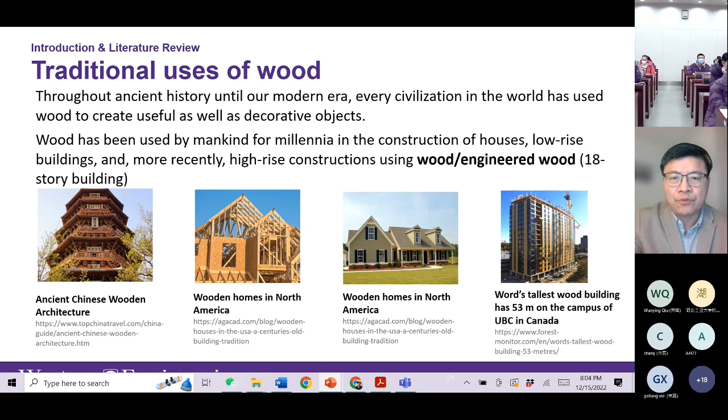A few years ago, Canada actually achieved the highest or tallest wood building, 53 meters high, on the campus of UBC in Canada. So they built the world's tallest building in wood structures. This is another application of wood for structural applications.

But if you look at wood structures in industry applications, actually they do not use the wood directly — they produce engineered wood. This engineered wood includes a family of different types, for example plywood, medium density fiberboard, medium density particle board, OSB (oriented strand board), and LVL (laminated veneer lumber).

So those engineered woods have advantages compared to natural wood. Engineered wood has dimensionally stable, more uniform properties, and they can utilize some wood waste, for example chips, sawdust, and other materials from the forestry industry, as well as utilize biomass from the agriculture industry, for example crop residues. They can produce engineered products from different types of waste materials.

The wood actually has some limitations. If you want to use wood for structural application, wood normally has poor water resistance — it can absorb water — and also wood is not good for fire resistance, and not good for mold resistance. This makes wood have some challenges if you want to use it for structural application.

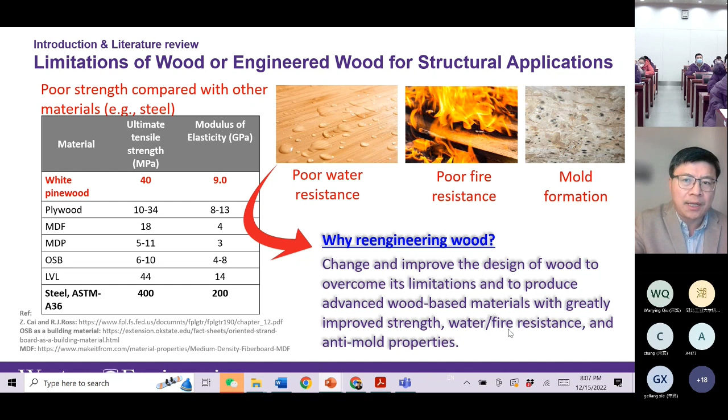So for reengineering wood, the reason for using it is to overcome some limitations of wood-based materials, to improve strength, fire resistance, and anti-mold properties. That's why engineered wood has gained more application in structural applications, in house construction, or in other structural applications.

We can convert wood to different materials. For example, we can do carbonization to make carbon for electronic applications, and turn wood into transparent wood for construction and window applications. We can also turn wood into an absorbent for environmental applications, and make wood into a structural application by densifying it. So wood has multiple applications because of its unique structure.

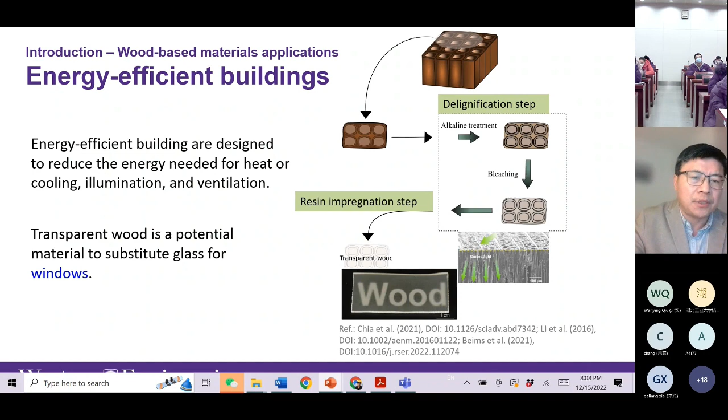For energy efficient buildings, this application was recently published by researchers in the US. They can make wood transparent, and this transparent wood can make a transparent window for energy efficient building applications.

Normally windows are made of glass materials, but if you make a wood-based transparent material, it has better properties. It can provide better light distribution, and also serve as thermal insulation, regulating the temperature inside the room. It can also be modified to add tunable properties, such as absorbing formaldehyde. This makes wood-based materials more useful than glass for window applications.

For environmental applications, people are still researching this. One example is a publication from 2019 that won awards, where they loaded several nanoparticles into the wood, turning it into a filter to remove water pollutants, such as E. coli, bacteria, and methylene blue dye from textile wastewater. They can use this for water treatment and heavy metal removal as well, making wood an interesting absorbent for environmental applications, particularly wastewater treatment.

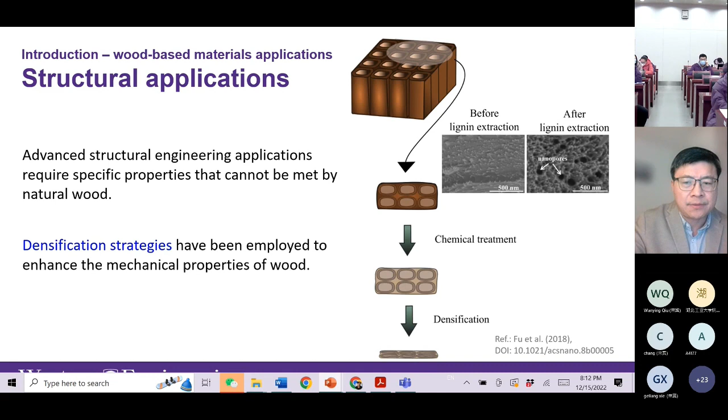After densification, this densified wood provides strong strength properties. This has been reported by a US group led by Professor Hu at the University of Maryland. They published several excellent works in Nature and Science, producing different types of high-performance structural materials after lignin removal and wood densification.

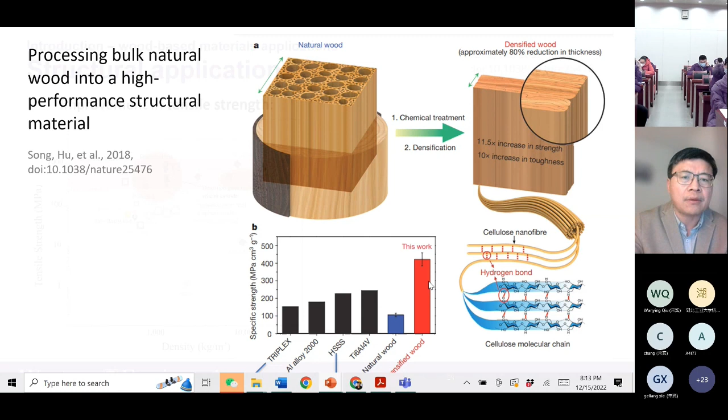Still from their group, they report this strong wood material in terms of tensile strength versus density. Looking at tensile strength alone, the densified wood falls in this circle here, and many alloys, such as aluminum-copper alloys and nickel alloys, are at the same level of strength. But in terms of density, wood has significantly lower density than the metals, making wood both the highest strength and lowest density material.

So this can gain lots of application in the transportation industry. For example, we can produce much stronger and lighter materials. And for the aircraft industry, this can make more energy efficient structural materials. They can reduce the density.

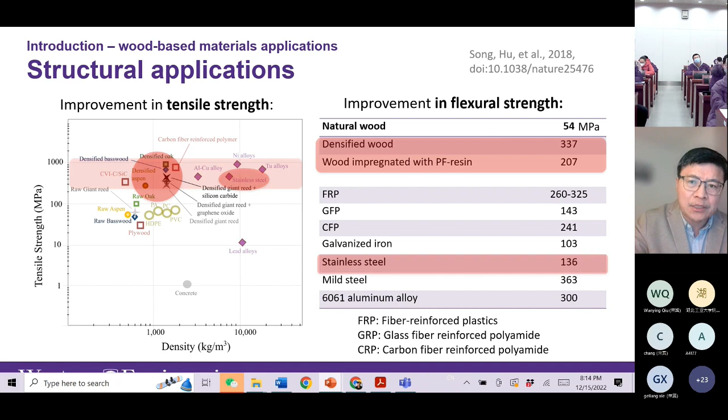And this table also compares the flexural strength, which is a bending strength. This flexural strength of densified wood is actually much higher than stainless steel, almost 3 times higher, and almost equal to some aluminum alloy. So this shows another aspect: this wood can be stronger in terms of flexural strength, bending strength.

But the challenges - nothing is perfect. It's still under investigation, under research. So some of the common challenges are that the processing time is very long. If you look at Professor Hu's published research, they remove lignin and then densify the wood. They take more than 24 hours processing.

So it's a long processing time, which makes industry application difficult. And the waste lignin is not utilized - it's just removed without utilization, and this is another kind of resource we should utilize. And the resin - they do impregnation of resin into the wood after removing lignin, but this resin is mostly produced from petroleum-based resin, for example petroleum-based phenol-formaldehyde resin or petroleum-based epoxy resin.

So how to solve these challenges? How to address these challenges? That's our research motivation - we want to address that, to overcome the long processing time, to utilize the lignin, and to avoid the use of petroleum-based resin.

So our research objectives, as I said, to address those challenges, we first extract lignin. But with our lignin extraction, we extract more efficiently. We use ultrasonic assistance to make the extraction more efficient to remove lignin and make a porous delignified wood.

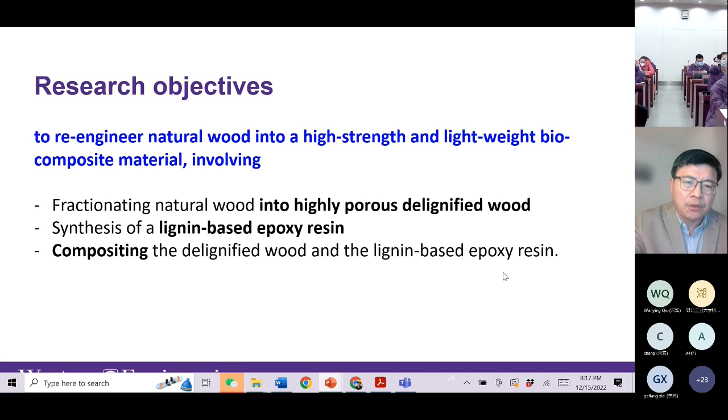So we do the delignification, remove lignin, and turn the natural wood into a porous structural wood. Then with the delignified lignin, we do the conversion - we convert the lignin into epoxy resin. Then we do the composite: we impregnate this lignin-based epoxy resin into the delignified wood, and then do densification, pressing, hot pressing, to make a composite. That's our final material.

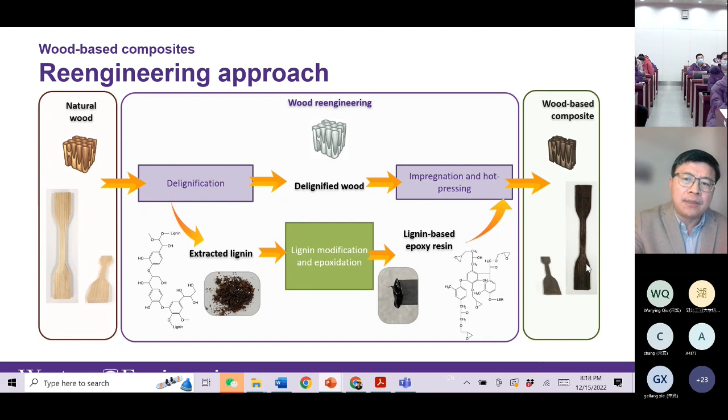This material is derived from the original natural wood, so we want to compare the property against this original wood. We call this process re-engineering. The idea is that we do the engineering first - we separate the components first, then do the conversion, another engineering step, then we do the composite back, which is another engineering step. So we call this a re-engineering approach, with our target being to make stronger and lightweight materials. So this is the overall idea for this research.

And this slide shows the morphologies. Natural wood has 70% porosity, and after removing lignin, we improve the porosity to 80%. The lignin content is reduced from about 30% to about 5%. So we significantly remove the lignin using the ultrasonic-assisted organosolv method, using organic solvent to extract the lignin.

And this is the lignin properties after we do the characterization, for example molecular weight and purity, and the epoxy content after we turn the lignin to epoxy resin - we list it here. In terms of molecular weight, our original lignin has a number average molecular weight of about 1,000. After we turn it to epoxy resin, this molecular weight does not change too much - the epoxy resin just epoxidizes the lignin functional group to introduce the epoxy group into the lignin structure.

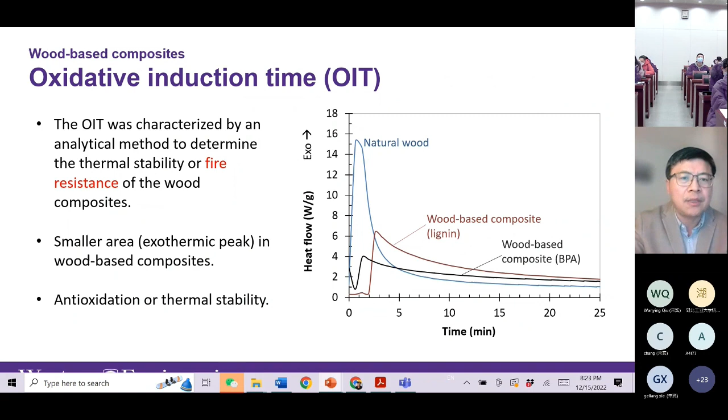Compared to natural wood, which can be oxidized or ignited within 1 to 2 minutes, our wood-based composite with the lignin-based epoxy resin can elongate that time to about 3 to 4 minutes. Also, the peak area shows how much heat is released from oxidation - this peak area is much smaller compared to natural wood, meaning the oxidation reaction is much suppressed by this wood-based composite material. That's another good property in terms of application, meaning it has some fire resistant property.

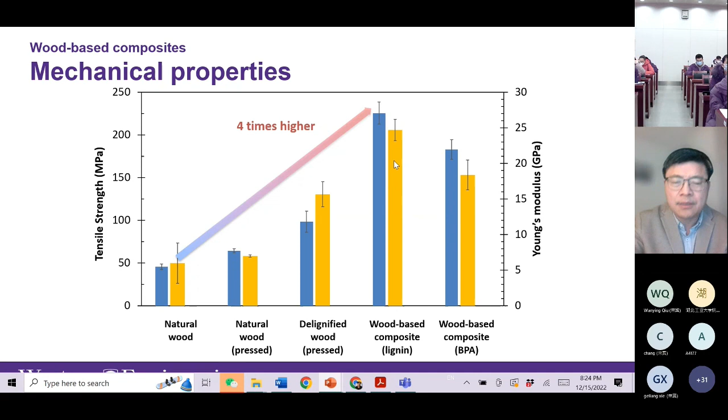Similar results for tensile strength - our material is almost 4 times higher in tensile strength compared with natural wood, and also much stronger than the commercial epoxy resin-based composite. This is another property demonstrated by this new material. So our lignin-based epoxy resin composite with wood achieved very high tensile strength and fracture strength.

Because of the lighter weight, this makes it more superior to metal materials - it's stronger and also lighter. So now we've achieved our target with this re-engineering approach - we obtained highly strong and lighter materials, and our process is better than the literature process. We do not have a lengthy delignification step, and we do not need densification for a long time - our time is only minutes, compared to 24 hours in the literature. This makes this process more advantageous than the current state of the art.

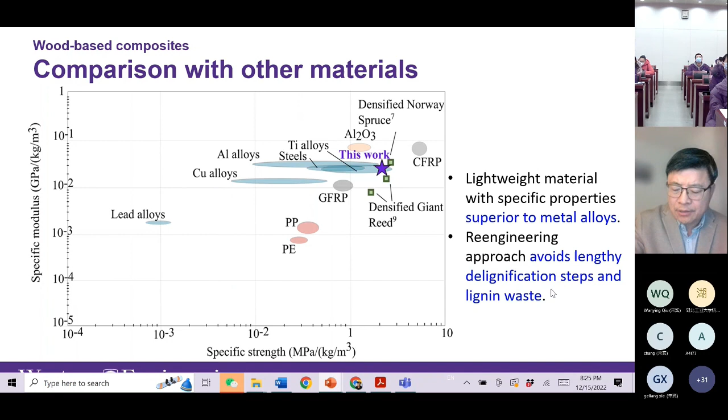So this material may not be suitable for acidic conditions. For some reason, we did some investigation on that, looking at why this acid condition can make this material lose intensity, lose strength. So we did some XRD analysis.

We show that after we do the HCl and sodium hydroxide treatments, the structures, if you look here, compared to original natural wood, the crystallinity reduces. That's probably one reason - they become more amorphous, so they lose crystallinity. This could be one reason contributing to the strength reduction.

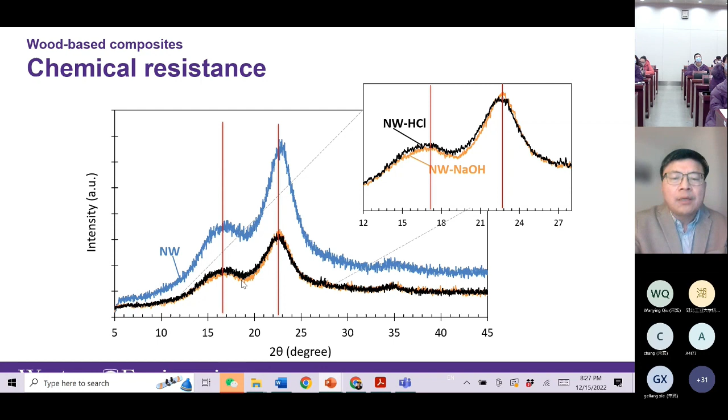In addition to the crystallinity, we also try to explain better about the mechanisms. Another mechanism is about the internal tension. Because for the original materials, epoxy resin and wood, after curing, we add some amine to cure that. So this amine can repulse each other, creating some internal strain, internal tension inside.

But if this material is in contact with HCl, the hydrogen chloride creates some electrostatic force within the materials - they have attraction force. This attraction force balances some of the tension, so the overall tension reduces. The overall tension reduction will reduce the strength, because the tension enhances the strength.

So that's about the materials, the reason, the explanation in terms of material science - why the HCl will reduce the strength of these materials. So we conclude that this material may not be good for acidic conditions, but it could be good resistant to other applications for water, sodium hydroxide, or sodium chloride.

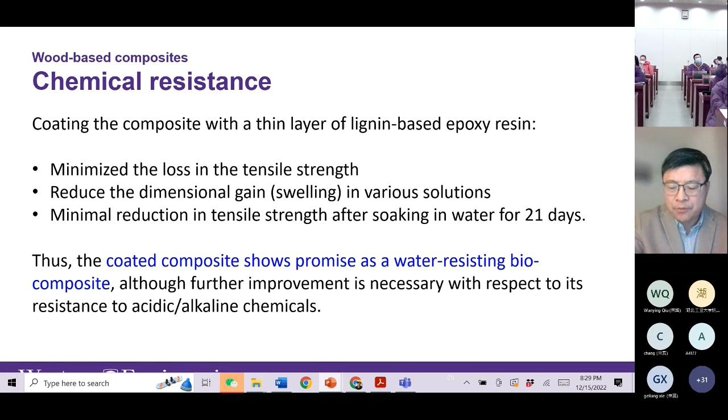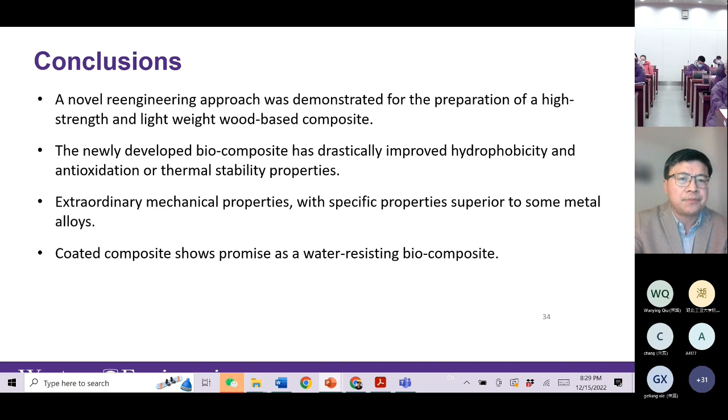The conclusion is that we achieved this novel process to produce stronger and lighter materials, and we can use that for many applications, for structural applications. And compared to the literature, we solve this, we address this as a challenge, and we make this process a shorter time, and then we utilize lignin, and we wouldn't use a petroleum-based resin.

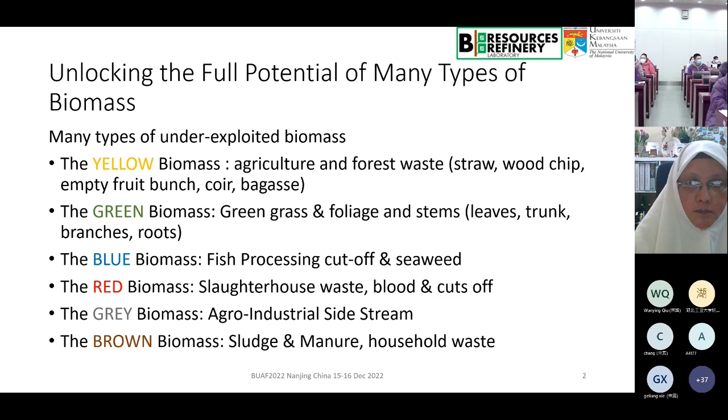Lots of green and yellow biomass, for example like oil palm fiber. We cultivate quite a huge amount of plantation area for palm oil, where you have lots of fronds which can be collected every day, the trunk, and also the oil palm empty fruit bunch.

We also grow quite high, huge amounts of rice plantation in the northern and eastern parts of Malaysia, where we have quite huge amounts of rice straw, and we have sugarcane and pineapple leaf, especially in the northern and southern parts of Malaysia. This is not being utilized. Every year after they harvest to get the fruits, the leaf is left unattended.

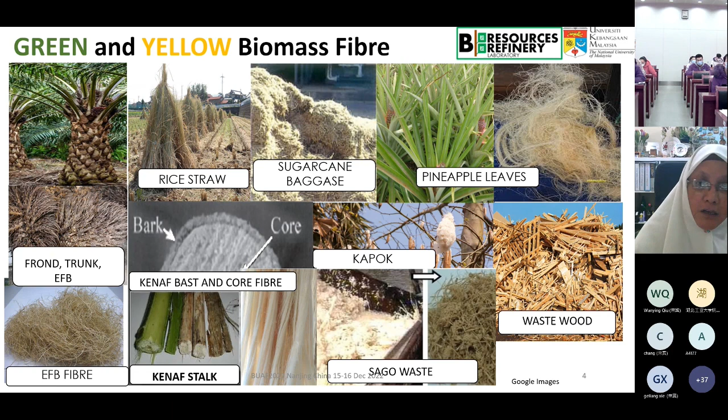And you have lots of sago which contains a high proportion of cellulose. And like in China you have cotton, we have kapok. The proportion of cellulose is also high in kapok, but the waxy material is very high, and there's lots of wood waste. And back to Kenaf, it is a very fast-growing species.

As far as Kenaf is concerned, within 2 to 3 months you can harvest it, where you have the bast fiber, the outer layer of the Kenaf stalk, which gives a good proportion of fibrous materials. The core part absorbs so much moisture, is very hydrophilic, and has a very high pore structure, and has been utilized a lot for low-end use, for example oil spillage, animal bedding, and so on. So for those working in composite materials, the bast fiber has been used a lot.

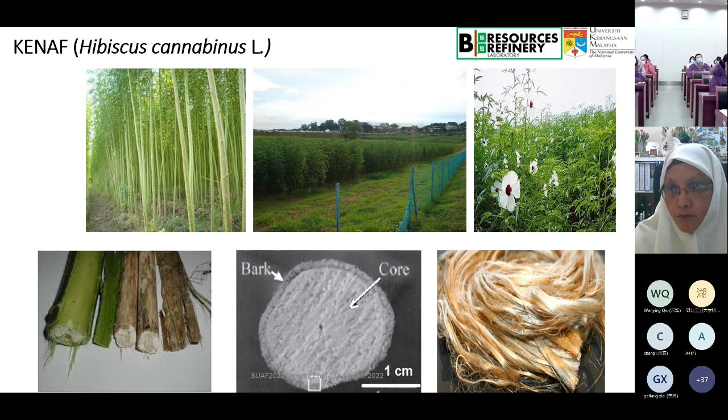As far as textile materials, weaving it together with the polymer and then pressing it makes a very good composite, good for automotive and other applications. Kenaf has been introduced in Malaysia since more than 10 years back, where many states in Malaysia started planting it.

The northern part of Malaysia has been focusing on production of Kenaf seed. They are trying to increase more area for Kenaf plantation because the urge for the bast fiber is higher. But the core part is not being utilized - there's a high proportion, about 60% of Kenaf core, which is not being utilized because of the short fiber. So we thought it would be good to convert this particular Kenaf core into high value-added products.

Like oil palm fiber - if you fly through Malaysia you will see many areas that have been cultivated with oil palm trees. After 5 years the trees start growing fruits. But the fronds have to be cut down, pruned almost every day, and the best fiber is from the fronds. But collecting the fronds from the palm oil plantation is very costly.

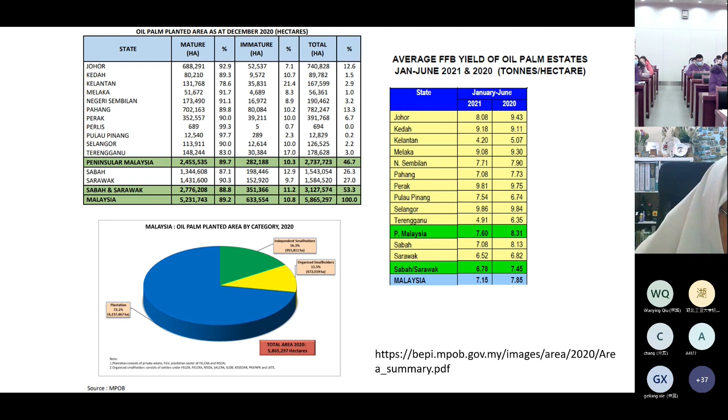This is the area where we cultivate palm oil, whereby every year, for example from June 2021 up to June, from January you're talking about 7.1 tons per hectare - they can produce an average of fresh fruit bunch per hectare. You can imagine how many hectares we have in Malaysia - a total of 5.8 million hectares has been cultivated as far as Malaysia is concerned, and lots of the area is from big companies.

So back to the biomass conversion technology, we went through lots of talk yesterday. They're talking about biorefinery, from energy, biofuel, bioethanol, biodiesel, biofuels, and biorefinery.

And you're talking about bioenergy: direct combustion, cogeneration, transformation, pyrolysis. And the next one is biomaterials.

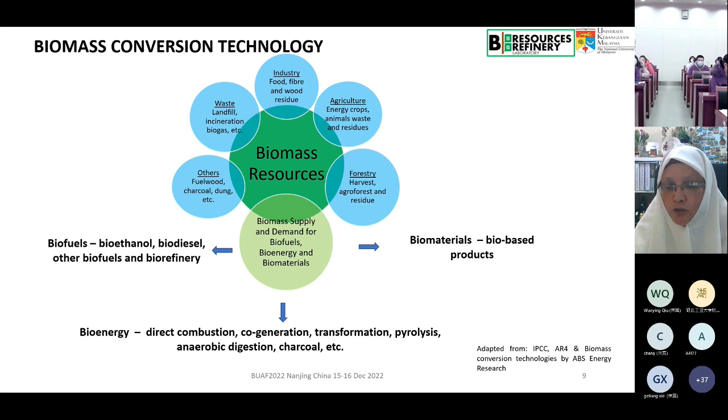My main concern, since I'm in the materials area as a chemist, is on biomaterials for bio-based products. Meaning after you make direct combustion, transformation, or pyrolysis, the liquid biofuels from here, we convert into biomaterials for high value added products.

Back to the kenaf and palm oil empty fruit bunch. The chemical compositions, as far as kenaf is concerned, you will notice the lignin is quite high, about 35%, with the holocellulose about 50%. Holocellulose is the content of cellulose and hemicellulose.

In palm empty fruit bunch, lignin ranges from 15 to 30%, depending on which part of the fiber is taken, and the hemicellulose is quite high, with the cellulose ranging from as low as 23 to as high as 65%.

If you're talking about cellulose, it's very good to convert these materials for high value added products. The lignin from EFB and lignin from kenaf is totally different, because lignin in EFB has a much higher proportion of the syringyl unit compared to the one in kenaf.

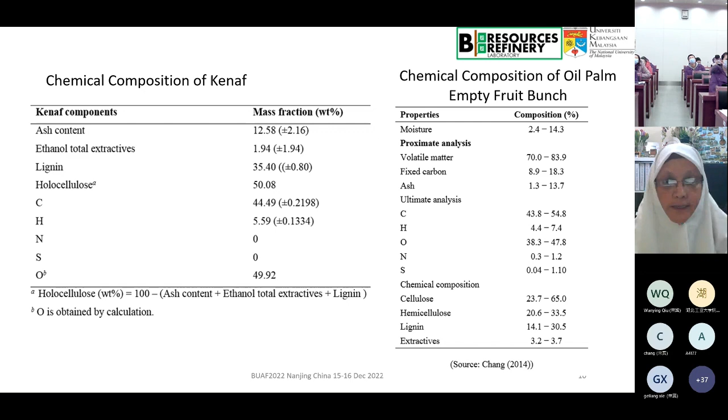We know that as far as cellulose is concerned, it has the crystalline and also the amorphous region. So if you want to do any modification, you have to disturb the crystalline area to make it more amorphous for any chemical modification.

You can dissolve cellulose by separating the microfibrils among the cellulose chain with a certain solvent. So you can separate and dissolve that, and regenerate it back to form another kind of cellulose.

The structure of lignin is very complex, that's why I keep asking how to make it stable, because lignin has a lot of conjugated double bonds, which is very active as far as UV is concerned, and will tend to polymerize.

Unlike hemicellulose, which are sugars and easily attacked by fungus and so on, which makes this material very biodegradable. The same with cellulose, which is made from glucose units, but it is more resistant because cellulose has amorphous and crystalline areas, compared to hemicellulose, which can easily be extracted from the materials.

So in this particular reaction, we are doing liquefaction, whereby we convert biomass into biofuel. You can convert using direct combustion, pyrolysis, gasification, and direct liquefaction.

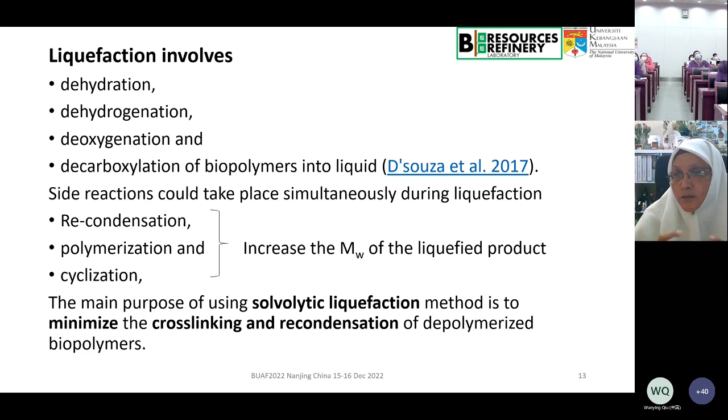That's why if you want to handle lignin, you have to use the lowest temperature possible. If not, you have to have a certain technique so that it doesn't polymerize, so you don't end up with so much residue at the end of the process. So now I'm talking about polyol, because polyol is very important as far as functionality is concerned.

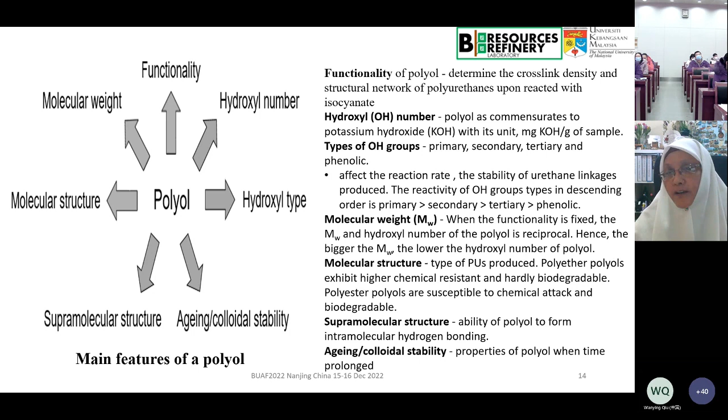We are using a catalyst. Before, we just used sulfuric acid, but now we make a combination of sulfuric acid and lactic acid to not make it so vigorous, but to control the reaction. With that, we can have about 10% as far as yield is concerned.

Lots of the lignin area has been delignified, and some cellulose has been degraded and dissolved in the liquefaction solvent, giving you the residue here. The most important part is to make the residue as low as possible, because you'll notice some residue is very high, since unlike oil palm empty fruit bunch, kenaf is very hydrophilic. It tends to absorb so much solvent when added to the system, making the solvent less reactive to work as a liquefaction reagent.

So you have to modify the process when doing kenaf in this liquefaction process. For oil palm empty fruit bunch it's much easier. We make two comparisons, one using empty fruit bunch, and the other using just the cellulose without lignin. Without lignin, you can have as low as almost 0.9% residue left, because we wanted as high a yield as possible. For EFB, you get about 4%, which is much lower compared to kenaf.

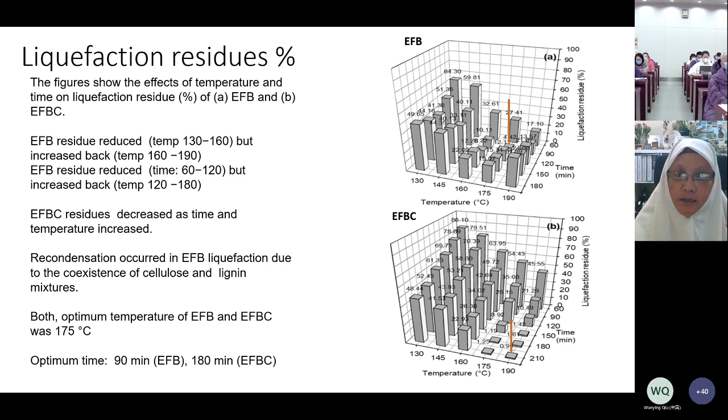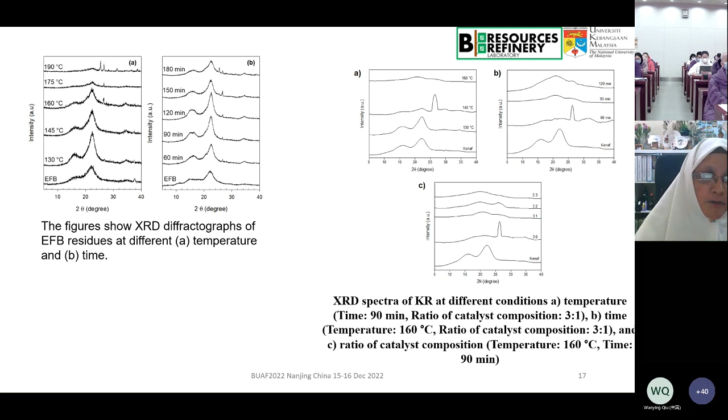So temperature, time, and the stirring factor contribute a lot to the percentage of residue. Looking back at the XRD, you'll notice that the crystalline area, whether kenaf or oil palm empty fruit bunch, has been disturbed tremendously and becomes very amorphous, to make sure it can be dissolved. This is the XRD of the residue, because if you run the XRD of the liquefied product, you will never see the crystalline area at all - it's all amorphous.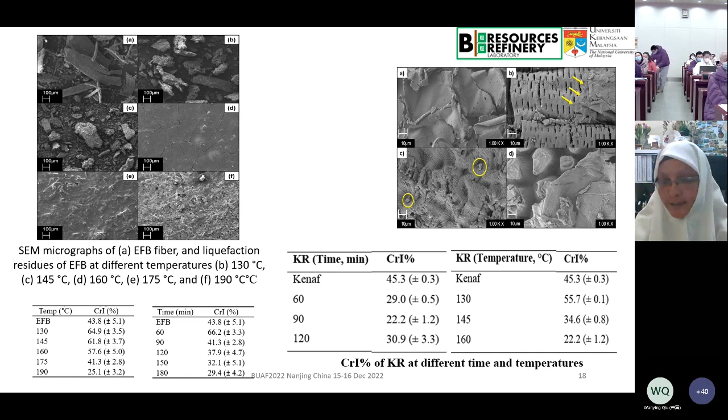This is the surface structure of the residue, and you'll notice that the crystalline area is decreased tremendously when measuring the residue. It decreases with the temperature and also with the time taken for this particular liquefaction reaction.

We also did the calculation for the OH number through titration. You have the OH as high as 300 plus for the kenaf, and with the ratio of catalyst composition varying from 3 to 0 without lactic acid, to 3 to 1, 3 to 2, and 3 to 3 with lactic acid, the percentage of residue is reduced, giving different amounts of the OH number.

The OH number is very important because when you want to make PU, the number will contribute to the properties of the PU, since it determines how much the OH will react with isocyanate in the process of making polyurethane. For the OH and acid number of EFB, the same thing happens.

At high temperature, the acid number increases because some of the hemicellulose changes and becomes acidic, turning into acid components. The OH number increases but then decreases because some of the phenol OH has been converted into acidic components. So it's very important to make a selection of temperature and time to ensure you have less acidics but more OH in the system, because at high temperatures some of the hemicellulose will be converted into acidic materials.

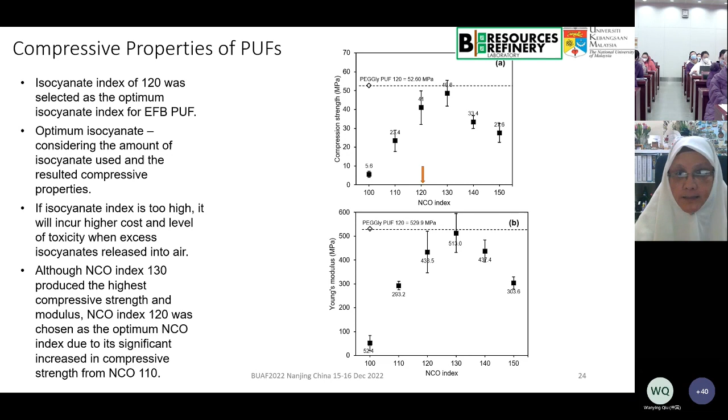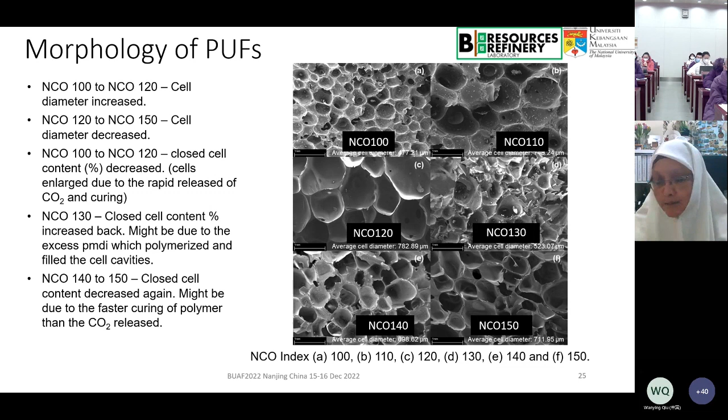But again, natural fiber is very difficult to control, because the lignin itself varies from one species to another, from the top to the bottom of the trunk, or even within the same plant—the percentage amounts of H, S, and G units are totally different even though the components are the same.

So with 120, you will notice the closed cell content is about 58%, and the density is about 166, which is comparably high. The Young's modulus is quite bearable and good, and the compressive stress is about 41.

It's moving by itself. Yes, we are fine, yeah, go ahead. Yeah, it's good, okay, one minute.

So now we're talking about water absorption. You will notice that at 100, the absorption is very high, but with 120 and above, the water absorption is lower, which is very good for a composite material. But for my application, I'm interested in the highest water absorption, because our end product is for agriculture.

So this is an example of the PU we made in the lab. It's very dark in color because of the lignin itself. This one is from kenaf, without polyethylene glycol. This is kenaf at different isocyanate levels, which gives different foam sizes and pore sizes.

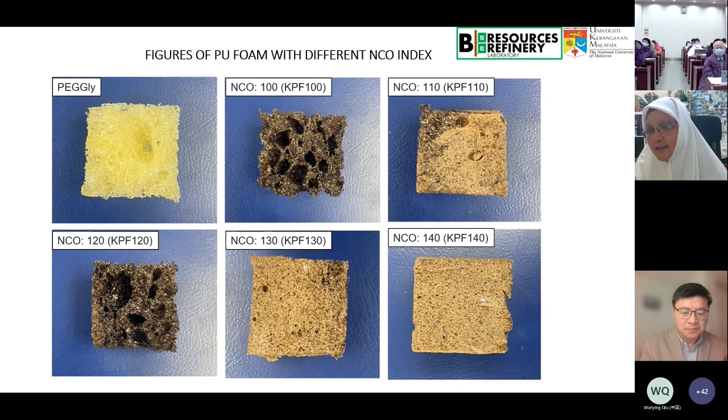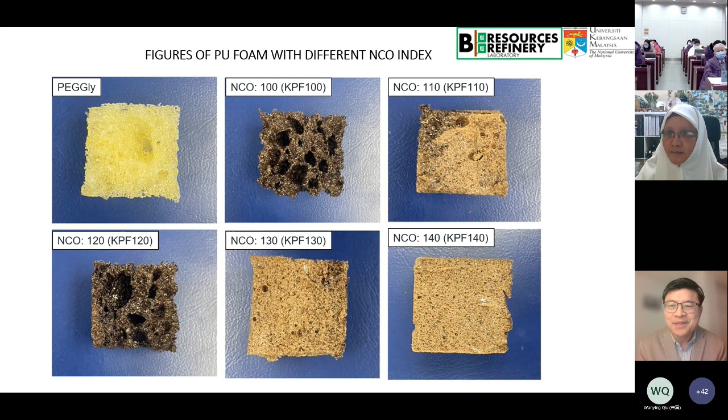Professor Jia comes from University of Toronto, Chemical Engineering Department, and he's a fellow of the Canadian Academy of Engineering, as well as a former president of the Canadian Society for Chemical Engineering. Professor Jia's current research focuses on the nanoporous structure of carbon materials for different types of applications. They produce carbon material from industrial waste, for example from coke or biomass, for applications including green energy storage and solar energy driven desalination. I think it's a very interesting topic today. So Professor Jia, you can start your talk about wood biochar as a structural and functional material for sustainability.

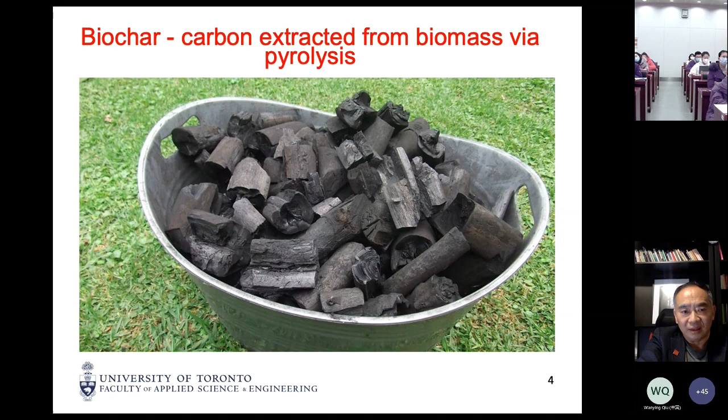It is well known that biochar properties are determined by biomass precursors as well as pyrolysis conditions. In thermal pyrolysis, it depends very much on precursor compositions, temperatures, and heating rate, which is extremely important. The mechanisms involved include thermal cracking of biopolymers, condensation, and rearrangement of carbon atoms. If we look at this diagram, with increasing temperature, graphitic structure can be formed.

At lower temperatures, say lower than 800 degrees C, there will be major changes in chemical composition, and the carbon content will increase. The materials we are dealing with here are produced at temperatures higher than 800 degrees C. As a result, they are highly carbonized, meaning they have carbon content over 90%.

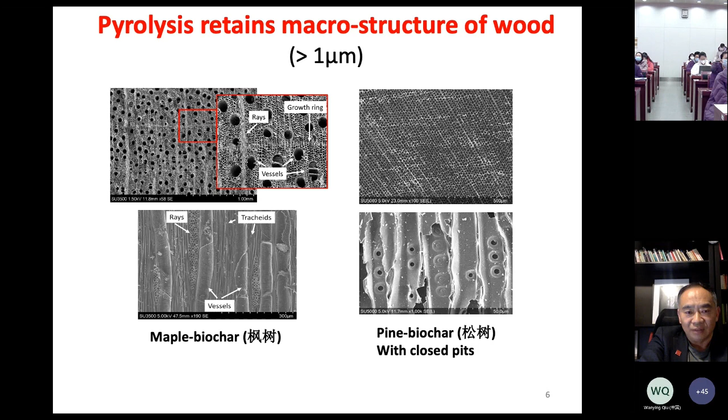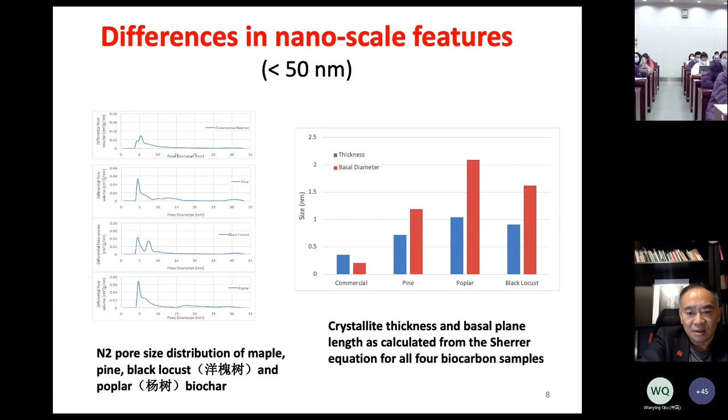So we've had a quick review of some properties of wood biochar. Before I introduce the work of my student, let me quickly summarize the applications of biochar. Everybody knows the traditional applications, including soil amendment, which in terms of amount used is definitely the number one application. Biochar has also been used as a renewable bioenergy source, as a solid fuel, and for cooking and other purposes. People are also looking at using biochar for steel making. Another application area is using biochar as an adsorbent for water and air purification.

There are some emerging applications for biochar, including as an additive to other materials, for example added to cement or polymers for different purposes. At a smaller scale, people also look at using biochar as a catalyst for reactions. There are examples of other people using biochar as a catalyst for water splitting, for hydrogen evolution from water.

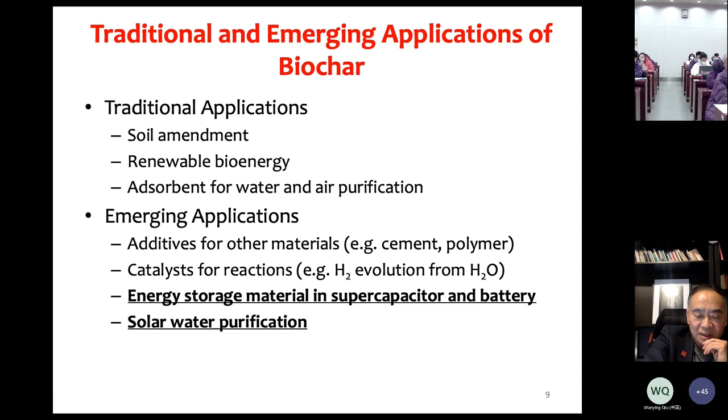The last application, which I'm going to talk about, is work done by my student, using biochar as an energy storage material in a device called a supercapacitor, and also for water purification, using solar energy for that application.

So what I'm going to do now is share some of the work done by my student, and the first piece of work is by Randeep. He worked on the electric conductivities of monolithic biochar. He pioneered this type of work and was among the first to report some of those unique properties of monolithic wood biochar.

By the way, monolithic means the whole piece—we were not talking about powders, which is usually the case when looking at other applications. So we're looking at whole pieces of wood biochar, which basically have the inherent structure of wood.

Randeep studied a bunch of precursors, including hardwoods. The hardest one is African ironwood, which is extremely dense, denser than water, and very light ones are balsa, also a hardwood, extremely light. He also studied common softwoods, and a grass species, bamboo.

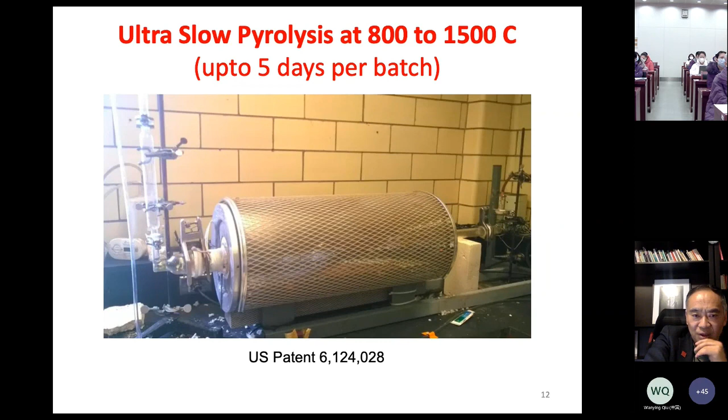Here is the reactor we use—we call it ultra slow pyrolysis—and in some cases, in order to retain structure, the process can take days.

Randeep actually used two different types of measurements. One type is the 4-point method, the purpose of which is to eliminate the contact resistance. In some cases, he also used the 2-probe method there.

First, the interesting thing he reported is elasticities of conductivities. What that's supposed to mean is that if you apply pressure to the monolithic biochar, the conductivity will increase. So with increase of pressure, conductivity actually increases, but if you release pressure, the conductivity decreases. He did that experiment after 1 day and repeated it, and those properties were actually retained.

On the right-hand panel, he's looking at if we apply pressure so that we depress the piece of biochar. What you can see here is that the conductivity increases with pressure, and if the depression is over certain values, the conductivity actually decreases - in this case that is due to the formation of micro cracks under those pressures.

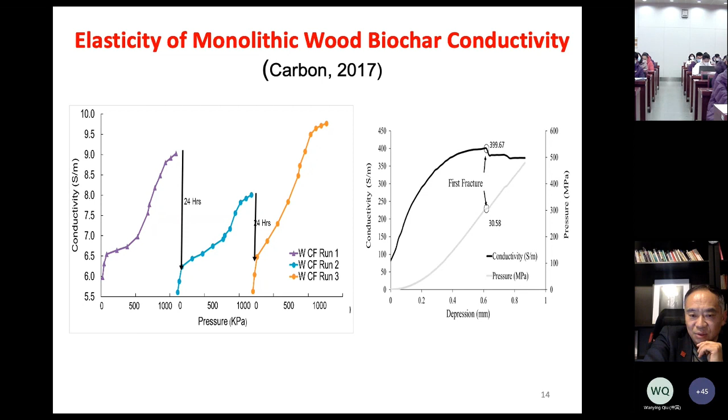Another interesting finding is that the electric conductivity is highly dependent on crystal size, in this case crystal volume. What we plot here is an increase of conductivity with crystal volume, showing almost a linear relationship. Different colors indicate different materials here.

The one point I want to make here is that if you look at the maximum measured conductivity here, in this case that is about 24,000, which is about almost 10 times higher than the graphite direction perpendicular to the graphene surface.

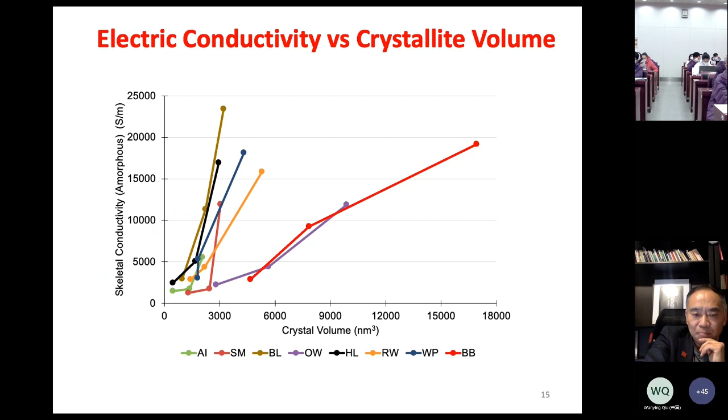Another finding is anisotropic wood biochar conductivity, meaning that the conductivity of wood biochar along the axial direction is always higher than the radial direction, regardless of the precursor. The reason behind that is the preferred orientation of graphite crystals in those wood biochars.

Let me now switch gears to another piece of very nice work. This is work by Evan Young, who used monolithic wood biochar to produce what we call ultra-thick supercapacitor electrodes, with the purpose of increasing the volumetric capacitance of a supercapacitor.

This diagram talks about the difference between supercapacitors and batteries. Everybody knows batteries, but supercapacitors are less known. The difference is that batteries can have a high energy density but low power density. On the other hand, supercapacitors have a high power density but a low energy density. High power density means you can charge a supercapacitor much faster than a battery, but as indicated in this diagram, supercapacitors tend to have a low energy density.

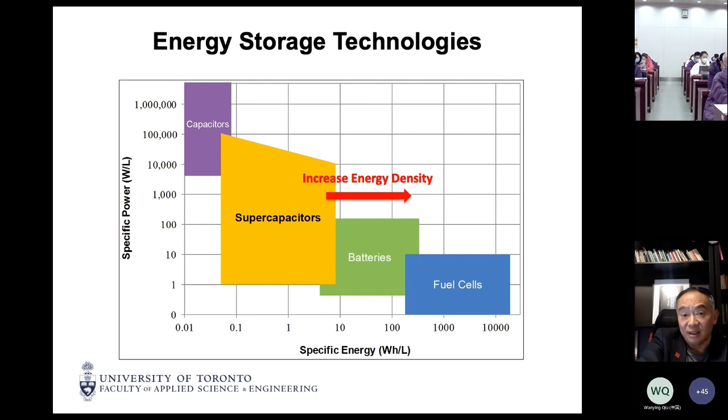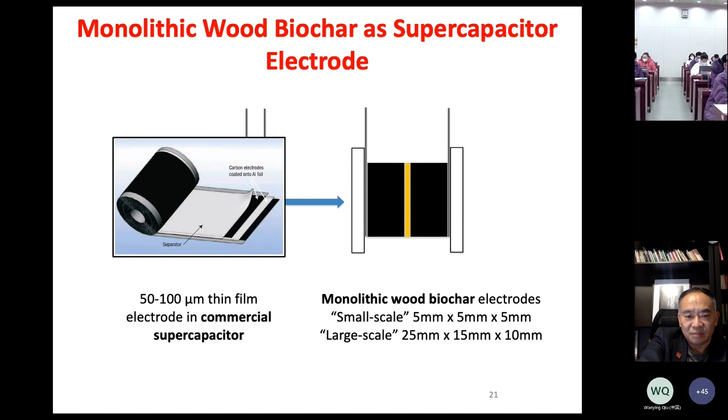Evan tried the traditional way to produce biochar, and also another way involving removing lignin. In this case we compress it, and the purpose is to increase the density of the biochar. We call it intensified wood biochar, monolith here. So these are two different procedures to produce biochar: one is a traditional procedure, and the other is after removal of lignin, so that we can compress the wood to produce high density wood biochar. Here is some result.

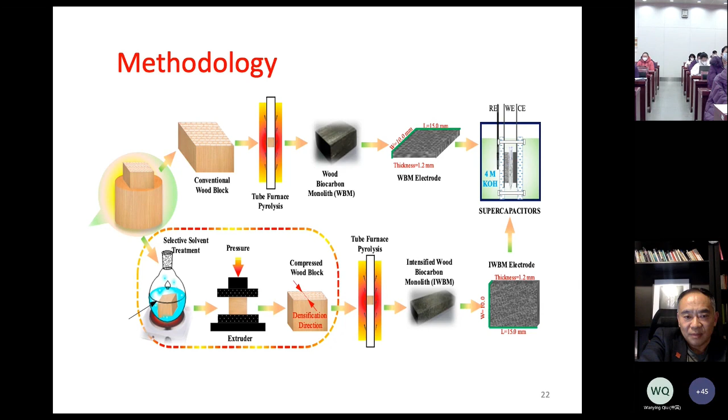I will not show detail here, but we apply BET analysis, XRD, and Raman to study structures. What you can see here is pine wood biochar - the top one is untreated, and the bottom one is compressed.

We also doped these biochar with some active materials like ruthenium oxide to increase the energy density as well. Here are some results showing the fine structures of those doped biochar, and the distribution of ruthenium.

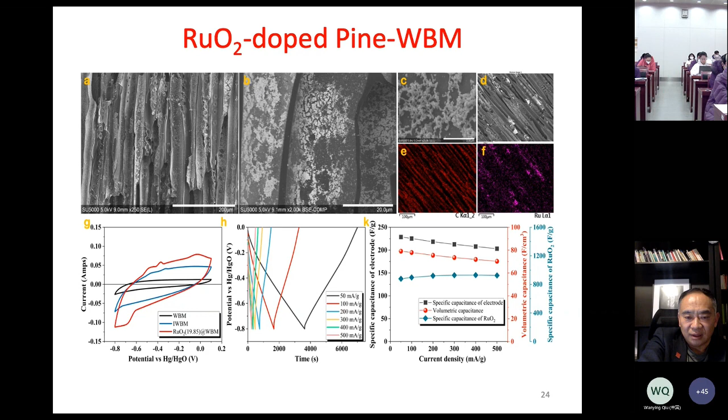This is a comparison in terms of areal capacitance. As you can see, both top two lines are from this wood-based biochar - one is the traditional, ruthenium oxide doped, and the other is without doping but only has an intensification process. So the bottom line is that they're promising - the performance is quite promising as a result for electrode materials.

Professor Xu, how am I doing in terms of time? You have still 5 minutes. Okay, 5 minutes? Wonderful, great.

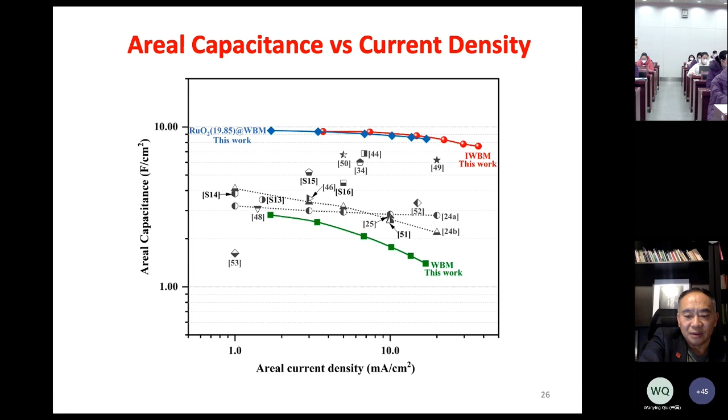The last piece I'm going to talk about is we also applied the monolithic wood biochar as a photothermal material for solar water purification. The concept is quite simple: we use the monolithic wood biochar as an absorber of sunlight, and it can convert the sunlight into thermal energy, and then the thermal energy drives water evaporation.

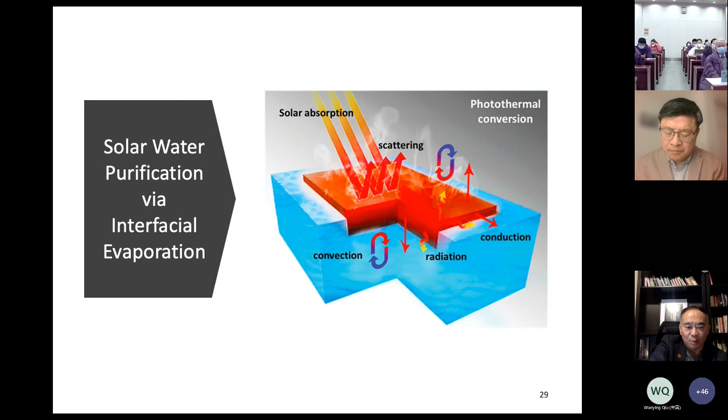This is so-called solar absorption, where light is converted into heat - a photothermal conversion - using visible light as the energy source to drive evaporation. Then we condense the evaporated water and get pure water.

There are actually 3 types of photothermal materials. One type is called plasmonic materials, which usually use different sizes of gold particles, and through an electron scattering process, the gold particles convert light into heat. Another type is non-radiative relaxation of semiconductors, which is more complicated. And the last one is a thermal vibration type, involving induced thermal vibration in the materials.

The biochar actually belongs to the last category, which relates to thermal vibrations of molecules, meaning that if you absorb visible light, the vibration of bonds within carbons will increase, resulting in a temperature increase.

Okay, so here are some results of evaporation rate of water from different wood biochars. We tested maple, pine, redwood, and hemlock, and we found that maple actually had the highest evaporation rate.

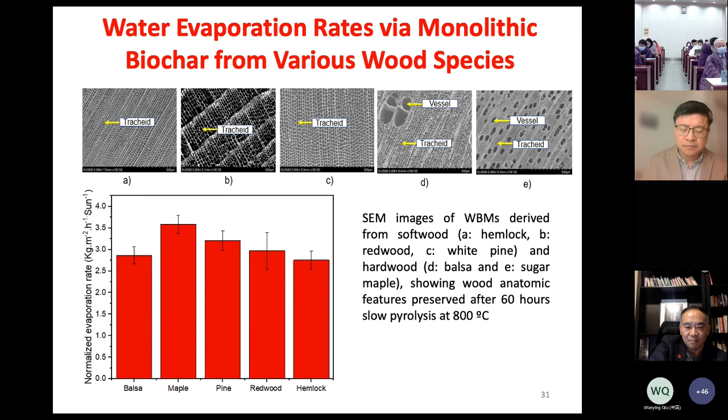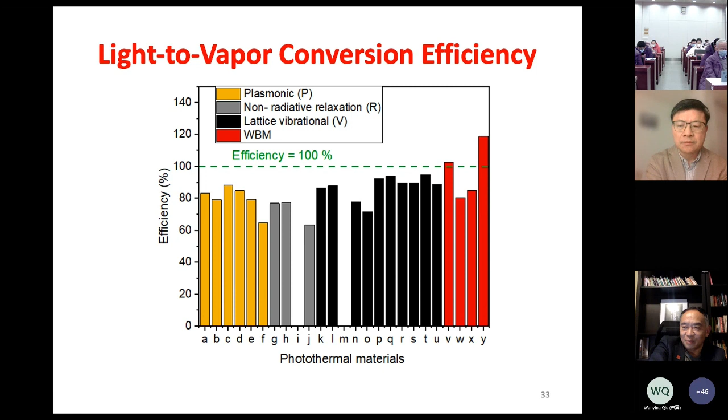We also calculated the light-to-vapor conversion efficiency. It's interesting that some of the efficiency is higher than 100%, which was a puzzle for us. But in the end, we found that the fundamental reason for that is this result.

What we found is that the monolithic biochar can reduce evaporation enthalpy, meaning that water confined in the biochar needs less heat input to be evaporated. The difference is huge: bulk water is about 2,500 joules per gram at 25 degrees C, but from wet biochar it can be reduced to only about 1,000, and if it's just humid biochar, even lower.

This is the fundamental reason we can have a case with efficiency over 100%, basically by lowering the energy barrier for evaporation. So the key takeaway here is that we believe monolithic wood biochar is a new class of functional materials with unique properties.

Of course, transforming wood biochar into a viable solution for alleviating climate change needs greater effort from more people in the classroom, students, and other colleagues. Thank you very much.

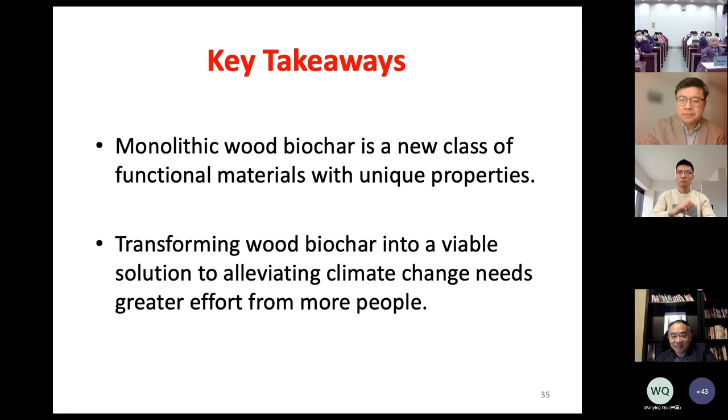We can have extremely highly porous carbons, like porosity over 90%, but because it's very light, the specific surface area is actually very low. So there is a trade-off between that. Also, for high capacitance, the number one issue is accessible specific surface area. You want it as high as possible, maybe over 1,000 square meters per gram, but at the same time it has to be accessible.

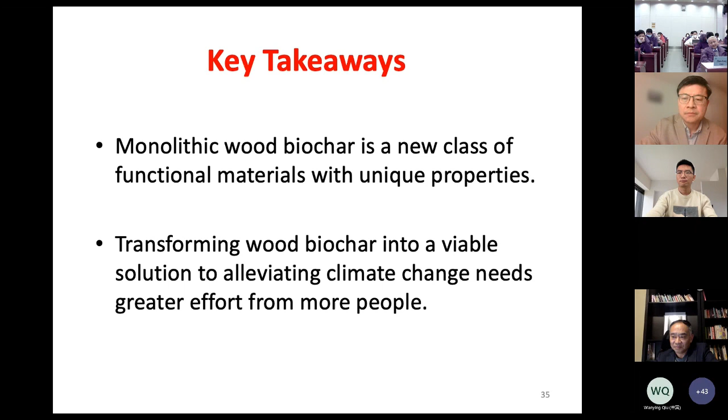Another way to increase capacitance is to introduce other functional groups, like the previous gentleman mentioned, oxygen and nitrogen groups. In our case, we tested other oxides, ruthenium oxide, which is very effective. Thank you very much.

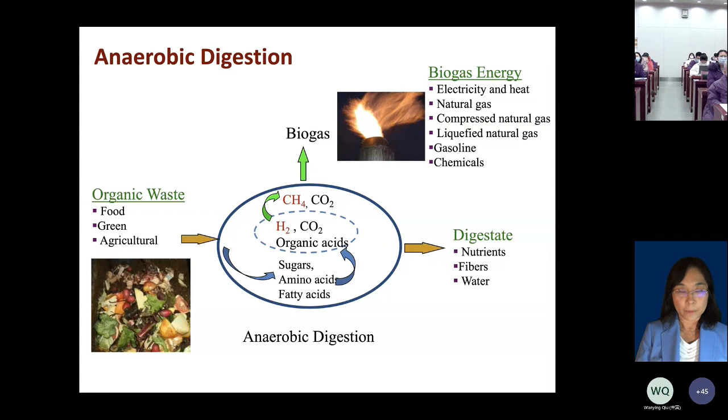Biogas contains 50 up to 80% methane, which can be readily used for heat and power generation. It can also be cleaned up and processed into natural gas, compressed natural gas, or liquefied natural gas, and further converted into gasoline and chemicals. So biogas is a valuable gas that can be further processed and utilized for various uses.

Biogas utilization has been largely applied at commercial levels, in internal combustion engines and electric fuel cells for electrical power generation. It can also be burned directly for heat generation, and used in compressed natural gas vehicles that take in renewable natural gas produced from biogas for fuel. All of these are commercially available.

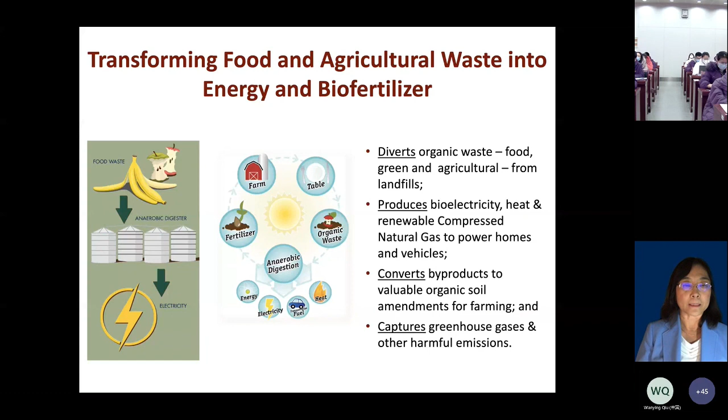In the United States, there are about 2,300 facilities that use anaerobic digesters. Most digesters are in cities, and most wastewater treatment plants in cities have anaerobic digesters for treating sewage sludge. There are about close to 70 digesters treating food waste, about 650 or so landfill projects, and about 300 anaerobic digesters on farms.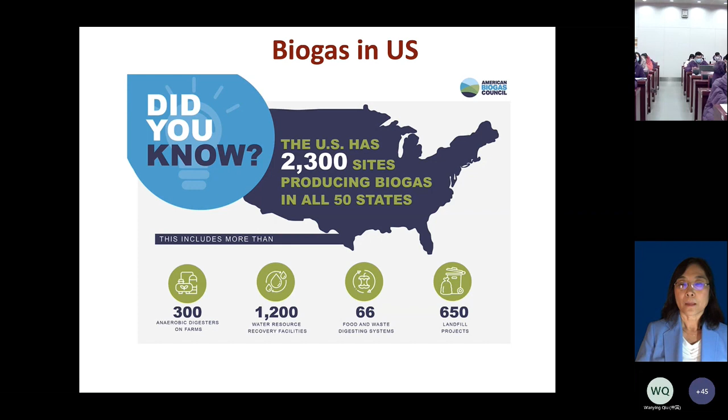That number is increasing very fast, because there's a lot of interest, initiative, and incentives provided by the government to work with livestock, especially dairy and swine farms, to build digesters. In California, in the past 7 years, there has been huge development of anaerobic digesters on dairy farms, because a new regulation requires dairy farms to reduce methane emissions from manure by 40%. That requirement translated into a lot of action, and dairy farms needed to really utilize technology, for example anaerobic digestion, to treat the manure.

The California state government is also providing a lot of funding to help dairy farms build digesters. Since 2015, the state of California has provided over $200 million as a cost share, normally about 50% of total capital cost, to support 130 anaerobic digesters on dairy farms. These are new developments in the past several years.

Most digesters are covered lagoon digesters, because dairy farms in California use water to flush manure into lagoons, making covered lagoon digesters the most common type on dairy farms. Here's an example of a covered lagoon digester on a farm with 1,200 dairy cows, where biogas is collected and put into an engine generator with 600 kW capacity for generating electricity.

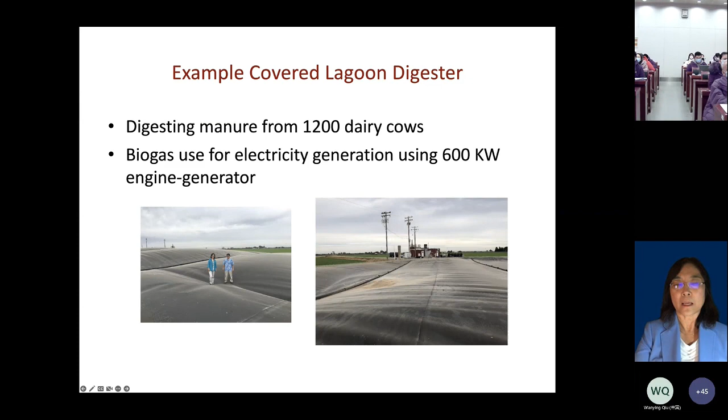The majority of anaerobic digester biogas projects on dairy farms process biogas into renewable natural gas. Basically, what it does is collect the biogas and remove moisture, remove hydrogen sulfide, remove some organics, then pass it through a methane purification system to produce renewable natural gas.

That program has been going very well, and more funding is being made available this year and will also be made available next year to help more dairies build more digesters.

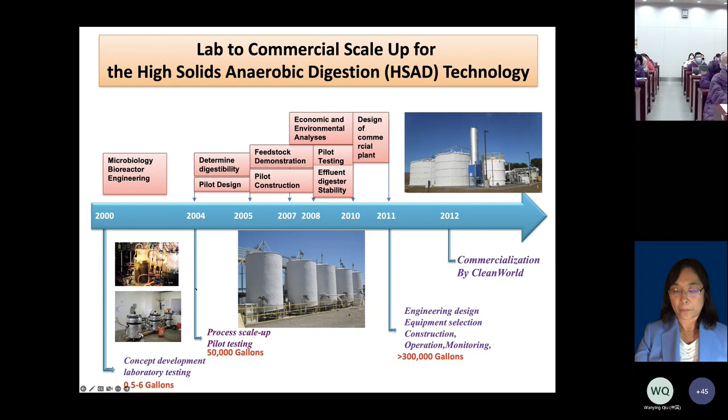We have developed three larger facilities using this high solids anaerobic digestion technology. One is for our campus at UC Davis. This anaerobic digestion facility is designed to process 50 tons per day of food waste.

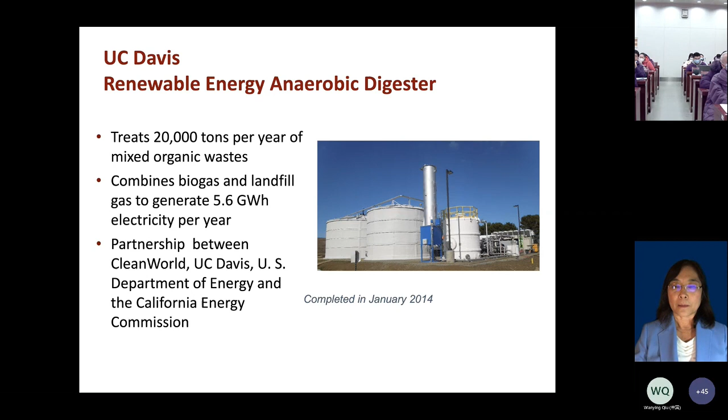It's on campus, so it provides us with a lot of opportunity for research and education outreach. Here's a photo of this facility, called the UC Davis Renewable Energy Anaerobic Digester facility, or READ. This one has 4 tanks.

The 3 tanks in the back are thermophilic digesters, and here's a digestate storage tank. These 3 digesters are connected in series, and the feedstock comes in, is cleaned up and ground, and then put into the first tank.

That is the hydrolysis acidification tank. In this tank, the material is degraded and converted into volatile fatty acid, then transferred over to the second tank, where a high density population of methanogenic organisms, methanogens, are housed to convert the volatile fatty acid into biogas.

The third tank is a polishing tank, where whatever is not digested gets digested. The biogas is collected from these 3 tanks, goes through this pipeline, and then is cleaned up.

This is the electrical power generation station. Here's a hydrogen sulfide scrubber, and here's the moisture removal by chiller. Then here's an activated carbon unit for removing some organics.

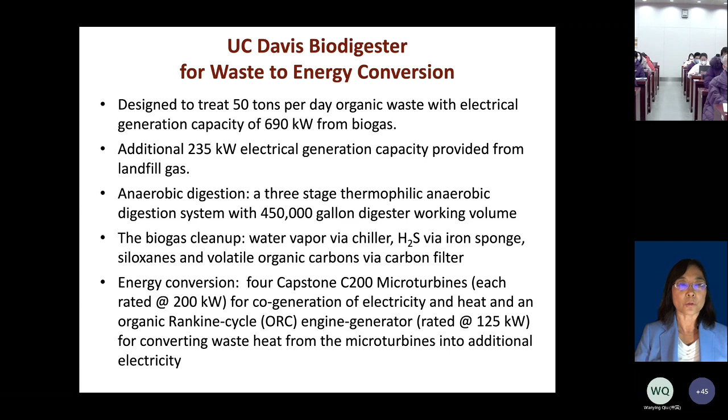So with that facility, we are continuing research to improve anaerobic digesters in order to increase efficiency and lower the cost. I've been working with my students - the challenge is we need to further reduce the digester size by increasing the rate of reaction, and also improve the digester control.

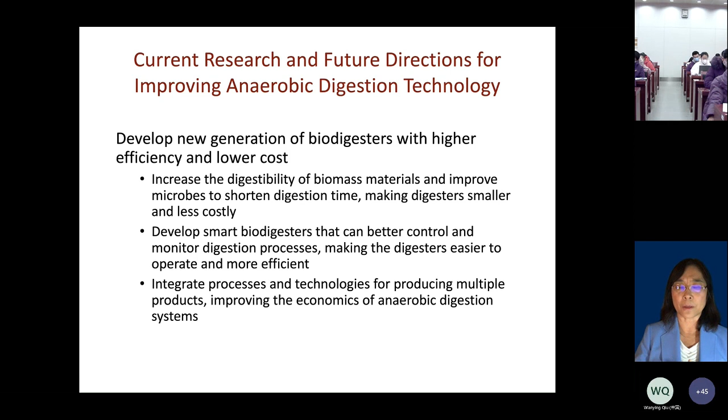So monitoring processes and integrating digesters with upstream and downstream processing technologies. What is downstream? Downstream is to utilize digestate as a valuable resource for producing organic fertilizers, nutrient-rich organic liquid and solid fertilizers, and we can use that for producing other products as well.

So this digestate has nutrients and micronutrients, has 3 to 5% solids content, and also has live active microbes.

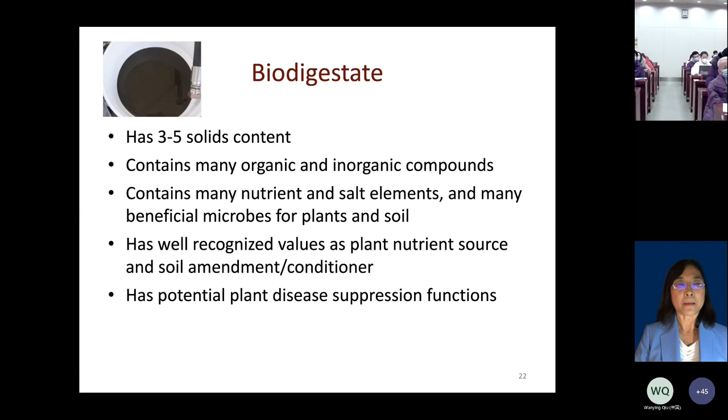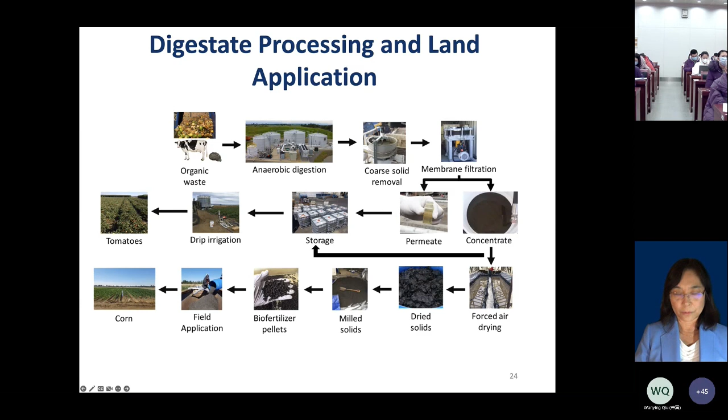We also produce algae, microalgae, from digestate, using the nutrients from digestate. Then we harvest the algae for biodiesel production, and also for adding algae biomass back into the digester for more methane production. We've been looking at other products from microalgae as well.

Here's another project. Right now we have been working for the past several years to produce biodegradable plastics, utilizing fermented food waste and some food waste that are rich in sugar. So we use this organism, halophilic Haloferax mediterranei, to produce PHA.

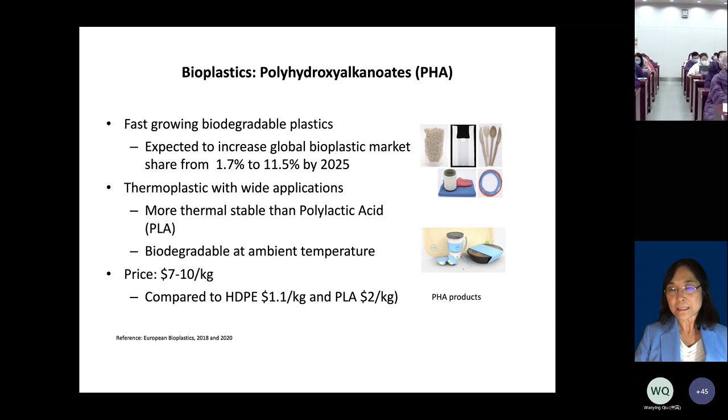What is PHA? PHA is polyhydroxyalkanoate, which is a highly desirable bioplastic material, fast growing and expanding in the bioplastic market, with properties close to thermoplastics that can be used for manufacturing various types of biodegradable plastics. It's higher value than polylactic acid, PLA bioplastics.

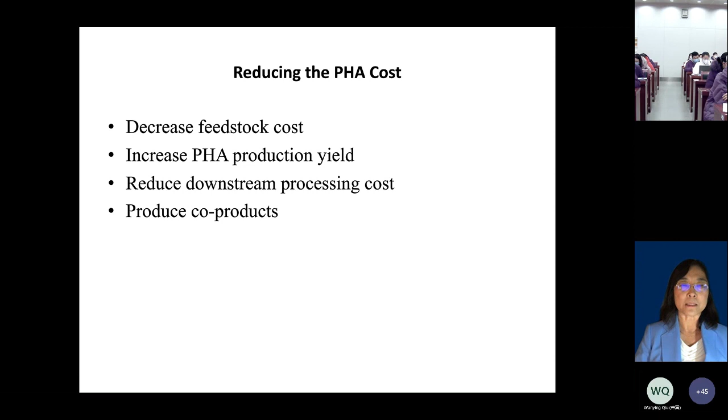Our research has been using food waste and other food processing waste as feedstock for producing PHA. We have developed the technology for taking in the waste, which we anaerobically ferment to produce fatty acid. Then we cultivate the cells to produce PHA. Now we harvest the cells and extract the PHA for biopolymer production.

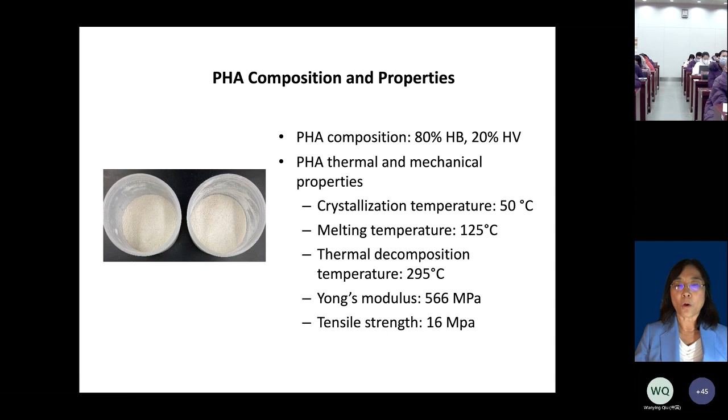We've been working on both batch and continuous fermentation. Here's PHA produced in our lab from food waste and from cheese waste. It has 80% HB, 20% HV - an excellent biopolymer that can be utilized to make plastic film or form products like spoons, forks, packaging, food packaging material.

Currently we are in the process of optimizing and scaling up PHA production, and also moving into producing some food packaging and food service products using the PHA produced from my lab.

With that, I wanted to acknowledge my research staff, postdocs, graduate students, undergraduates, and also a lot of industry partners working with us, and certainly government and industry funding agencies that have been supporting my research program at UC Davis. With that, I will stop.

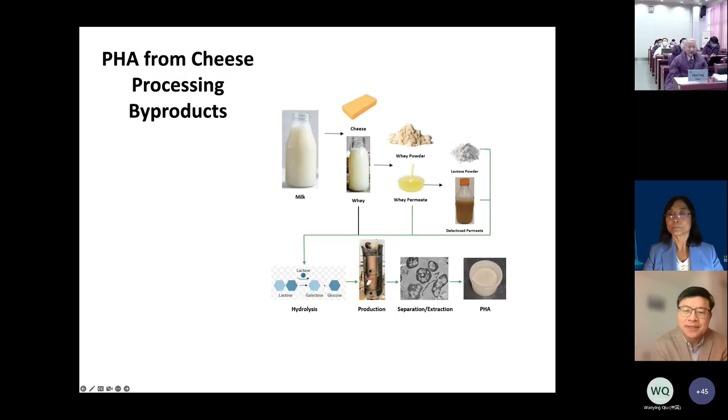Very good. Thank you for sharing those interesting results. So if no question from the audience, we will - Professor Xu. Can I have a very short question? Yeah, sure, okay, go ahead. Okay.

This is Zhang. Professor Zhang, many thanks for your very nice presentation. Particularly, I'm impressed by your commercial plants. My very simple question is, in the States, is there any commercial plant for biohydrogen production? Oh yeah, that was a very good question.

Very good question. I did a lot of work on biohydrogen. Biohydrogen, we actually from our two-phase digestion, biohydrogen is produced from the first stage, the acidification - that's where biohydrogen is produced. But in our case, we directly pipe the biohydrogen into our second phase, so we are only getting methane, we're not collecting biohydrogen.

My experience has been that batch feeding operation is very important for biohydrogen, for high yield biohydrogen, compared with continuous feeding. We do produce biohydrogen, but we're not collecting it as hydrogen - we actually just convert biohydrogen into methane in our case. But the biohydrogen is important in the process.